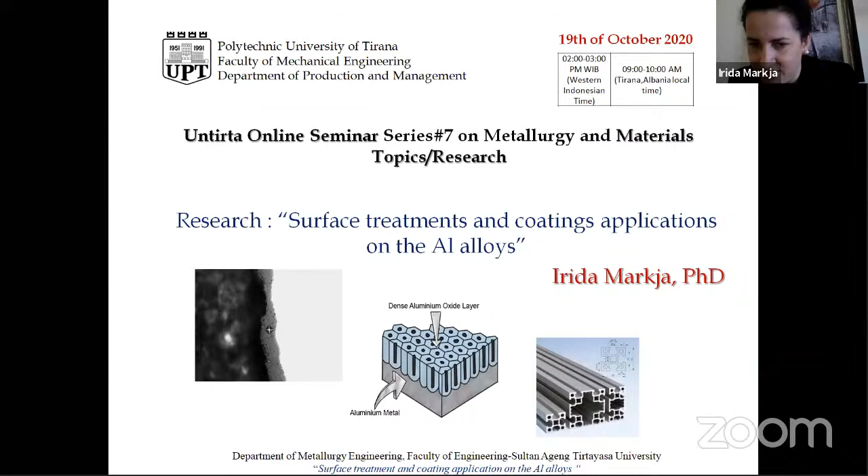As a definition, surface engineering is the treatment of the surface, or metallurgical surface, also near-surface regions of materials, to allow the surface of the products to perform the functions, and also to increase the properties of the materials differently from the bulk of the materials.

As a definition, we know from surface engineering, the properties of the materials increase to create a new surface or a thin layer with different treatments. We will see today anodizing as a process for aluminum products, which is a process adapted for aluminum chemical composition, or aluminum as an alloy, not aluminum as a metal.

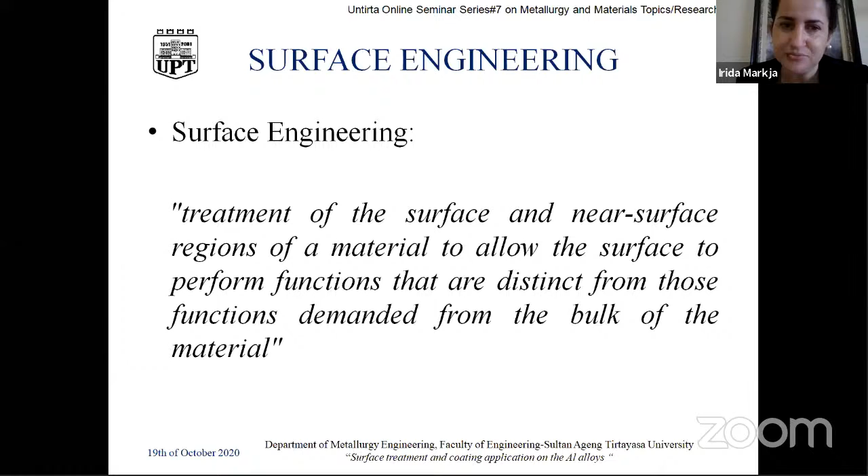The desired properties or characteristics in the field of surface engineering: components need to improve the mechanical properties, also tribological properties. We can distinguish improving hardness of materials, meaning hardness on the surface of the materials, also as tribological properties, improving the wear and also the corrosion resistance of the surface, related to the functionality that the materials or products will have.

Also controlling friction, improving the lubrication. It depends on the geometrical configuration of the products related to aluminum products.

Also, these processes underlining surface engineering refer to different post-processing to create a new surface layer with the properties that we need, to have long-term or long use, to have a life cycle of the product different from without treatment.

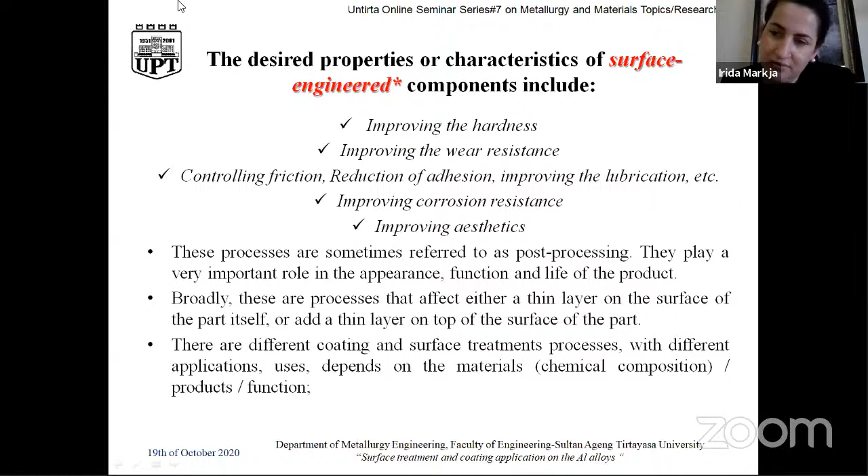And we will see what I have tried to conclude in this presentation: a comparison between an aluminum alloy without treatment, without anodizing, and an aluminum product of the same chemical composition with surface treatment, or an aluminum product with anodizing, creating an oxide layer on the surface with a thickness related to the standard and the industry, to see the differences and compare the properties. In our study, we have compared micro hardness and the results after comparison.

This is the aim of this research and this presentation. My presentation is not only my own work, it is related to my colleague, and part of the samples, and our students who worked on a small study for their diploma degree.

We will introduce the influence that anodic surface treatment parameters have on the thickness of the layer created, and the different structure created on aluminum products. This is the layer that will have the function during the functionality or work of the aluminum products, or however they will be used.

The materials used in our study or research are from a company in Albania, Alumil company, and the series we have worked with is from the 6060 aluminum series.

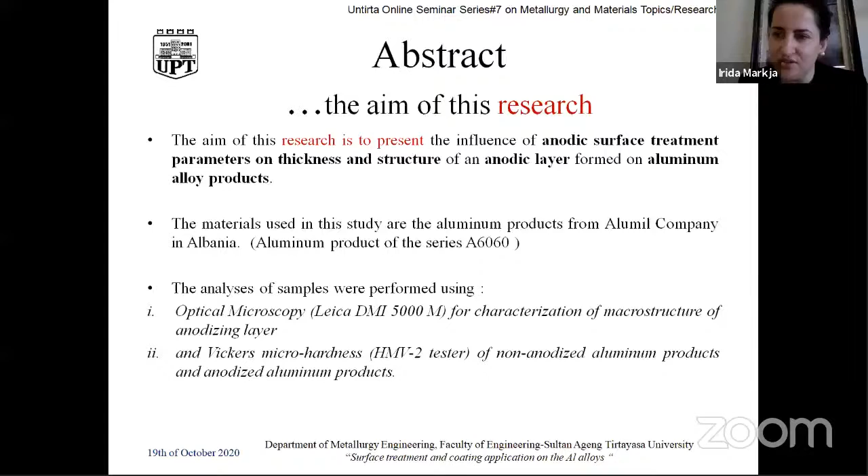We know that aluminum and its alloys, in our modern technology, have more advantages, and are the world's second metallurgical product after steel, due to some nice properties that modern technology uses, especially low density and good thermal and electrical conductivity.

Due to the complex of advantageous properties that aluminum alloys have, industry and technology use them, and we see that aluminum based alloys are very useful due to the properties they offer.

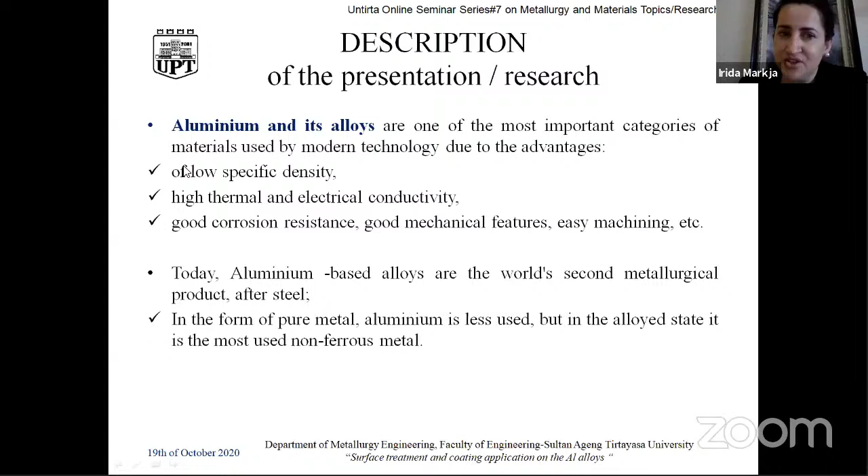Surface treatments and coatings are applied to aluminum products to enhance their performance and improve surface properties of final products, such as the tribological properties we mentioned in the first slide.

Not only anodizing, but different types of surface treatments are applied. Anodizing is one of the best or more useful from the industry, because the oxide layer achieved is very protective for aluminum products, especially when these products have complex geometry, depending on the engineering technology.

They also have a few decorative purposes with different colors, which is part of aesthetics in modern technology, or in our days.

It's one of the common methods for superficial oxidation processes, also carried out through anodic oxidation. It's a chemical reaction on the surface of aluminum products which creates the oxide layer.

The usability of aluminum products and aluminum alloys after anodizing treatment, or chemical treatment on the surface, depends on the properties that the oxide layer achieves during this process, because it depends on the chemical composition of the aluminum alloys.

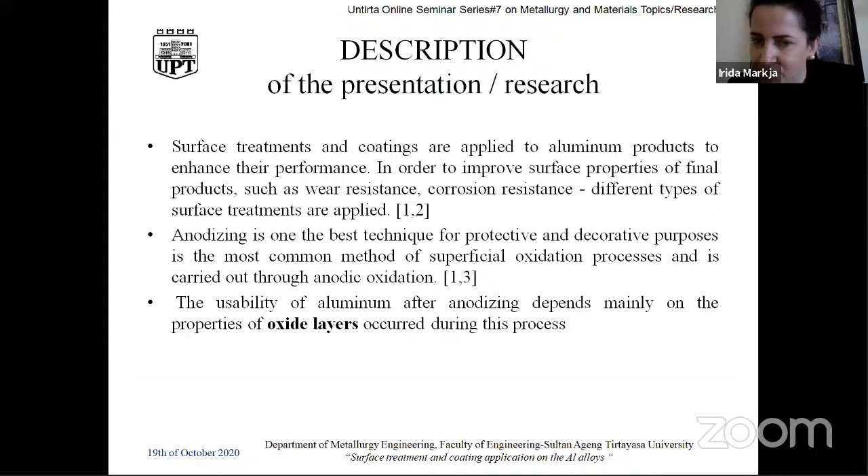As a surface treatment, it's an electrochemical treatment that increases an oxide layer, not too thick, but a thin oxide layer on the surface of aluminum, which will be the layer responsible for the life of the products.

This is a scheme that tries to connect the processes of electrochemical treatment.

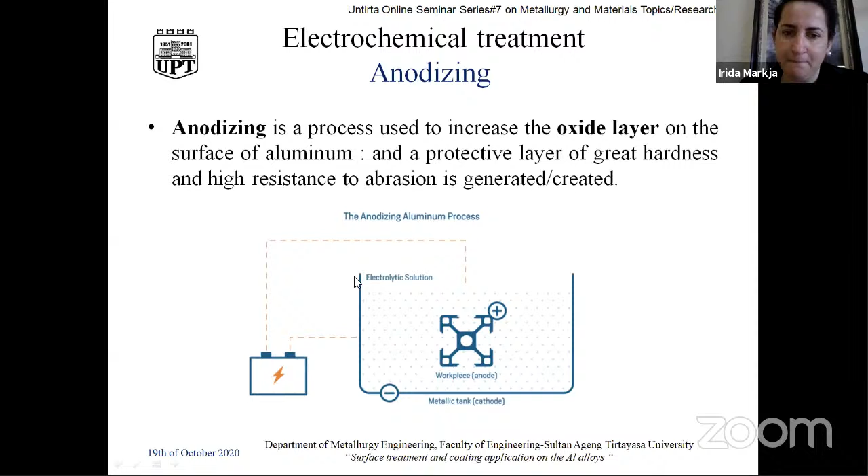The first section of our study is to evaluate the thickness of the oxide layer created after anodizing. First, we carried out the transverse section of the anodized profile samples after polishing and metallographic preparation in our laboratory. Observation for thickness estimation of the oxide layers was performed with 500 and 1000 magnification using an optical microscope, and micro hardness Vickers with 400 magnification.

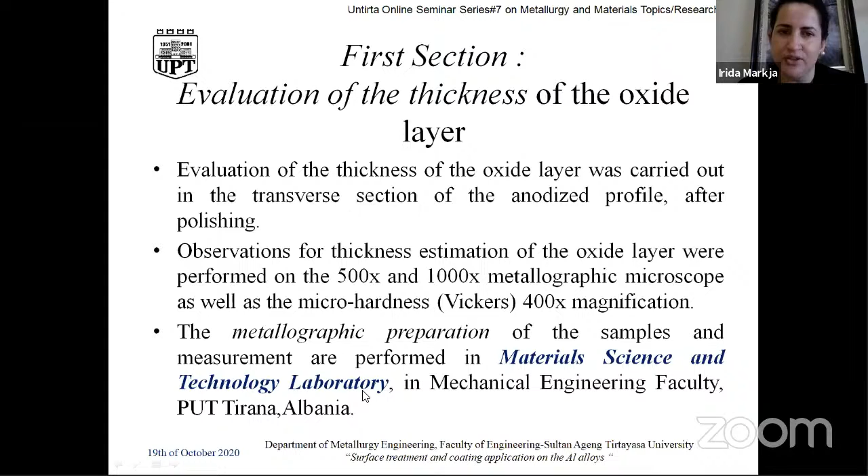Metallographic preparation and the equipment, we actually have them in our laboratory, performed in the material science and technology laboratory in our faculty. The second section, after evaluation of the thickness of the oxide layers, is that we estimated the anodized layer, and our work or research is focused on the experimental part for estimating the thickness of the anodizing layer.

And micro hardness Vickers we have performed on aluminum products with anodizing treatment on the surface, and on aluminum products without treatment. For sure, we have taken the samples in different elongations of the aluminum profile, in different sections, to see the anodizing process along the whole aluminum profile, and the homogeneity of the process at different points and different sections of the profile or of the surface engineering,

because we should have a homogeneous anodized layer or surface layer, to have a compatible surface and the same properties at different points of the surface. From this analysis, the engineers responsible for the analysis, or from our research, we will see the results and say that, let's say, 95% or 100% the micro Vickers is the same at different points or sections of the aluminum products.

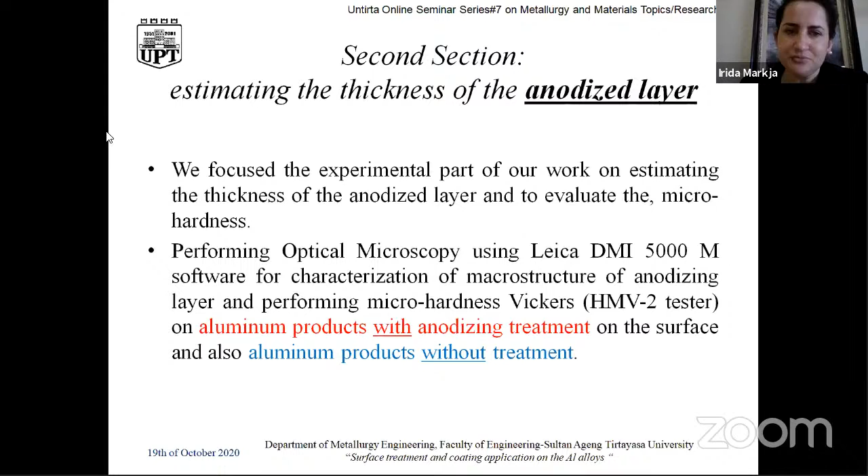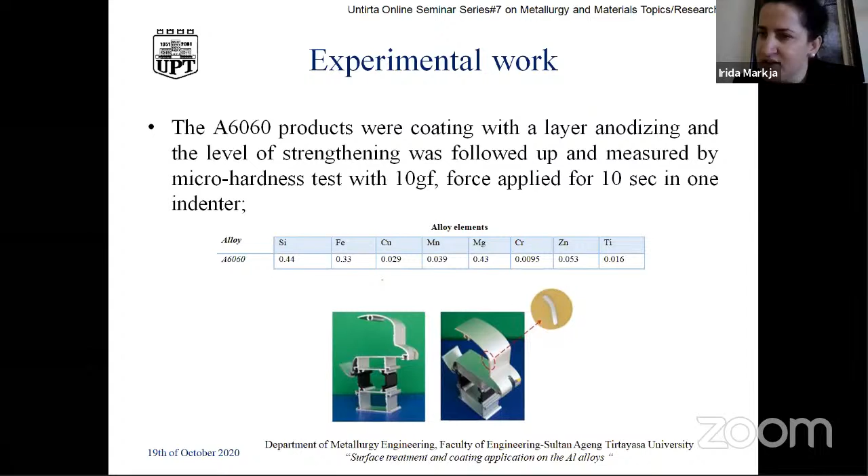The series products used are from 6060, and I have shown the chemical composition of the elements of this series of aluminum. The micro hardness Vickers is tested with 10 gram-force, and the force is applied for 10 seconds for each indentation measurement. Also, part of the research and experimental work is focused on the thickness of the anodized layer, but maintaining the time for the anodizing bath is important for the results and for the properties that the oxide layer will achieve after the experiment.

These are samples that we have prepared, two planes or two sections of the samples. And this is the microstructure and the oxide layer created after the anodizing process. And here is one indentation, which we have taken with optical metallographic microscopy. And this is the whole oxide layer created on the material. And this is the aluminum profile without treatment. This is the new surface created from the anodizing process,

where we will see that the thickness is not the same throughout this microstructure that we have taken at the moment with one indentation. So along all the layers, we will make different indentations to see the micro hardness and to measure the mechanical properties of the samples or of the layer. The magnification for this microstructure, we have used 500.

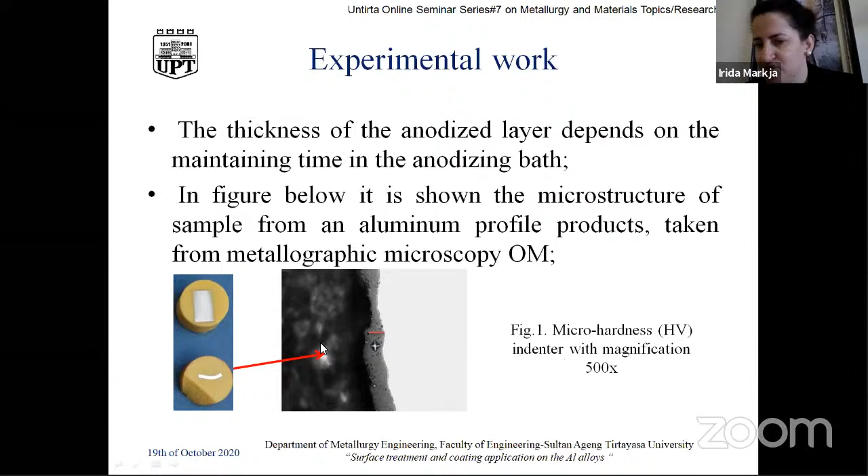As a conclusion, from the definition of surface engineering, the anodized surface of aluminum products, based on the micro hardness measurement results, has higher hardness compared with aluminum samples without surface treatment. The micro hardness of the anodized layer is in the range from 420 to 560, which is great, because for steel with a medium heat treatment we have hardness in the range of 400 to 500 Vickers. The aluminum samples without treatment, for our profile, range from 55 to 70 Vickers. So it's a very big difference between the materials before and after surface treatment.

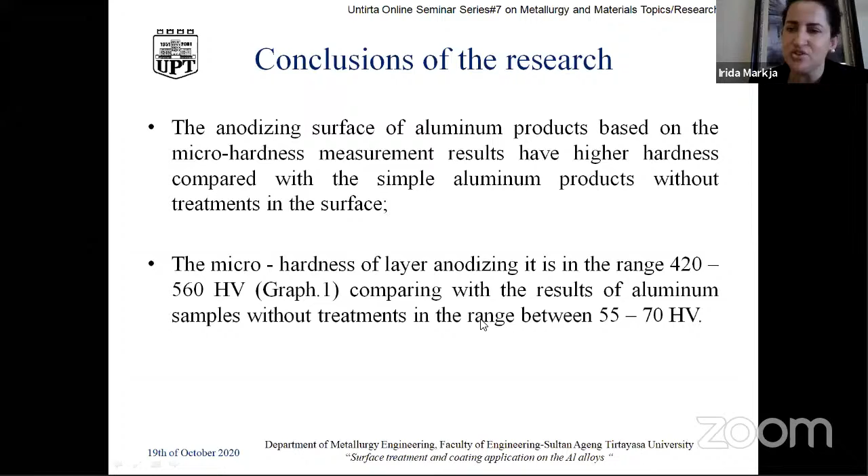The conclusion we have shown in the graph, which compares the homogeneity of the surface treatments, because okay, we achieved a higher hardness, but one of the most critical issues is the homogeneity of the surface treatment. So in this presentation, we have shown 10 measurements for different distances, but the whole paper has more micro hardness results to see the homogeneity of the oxide layer created on the aluminum surface.

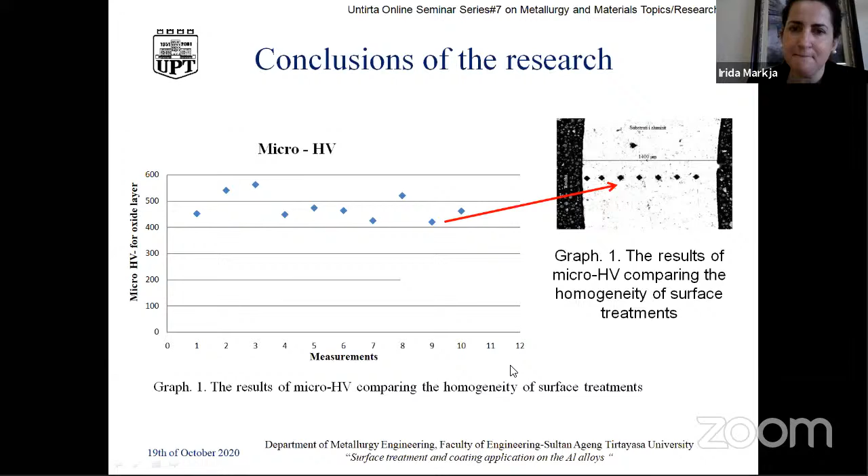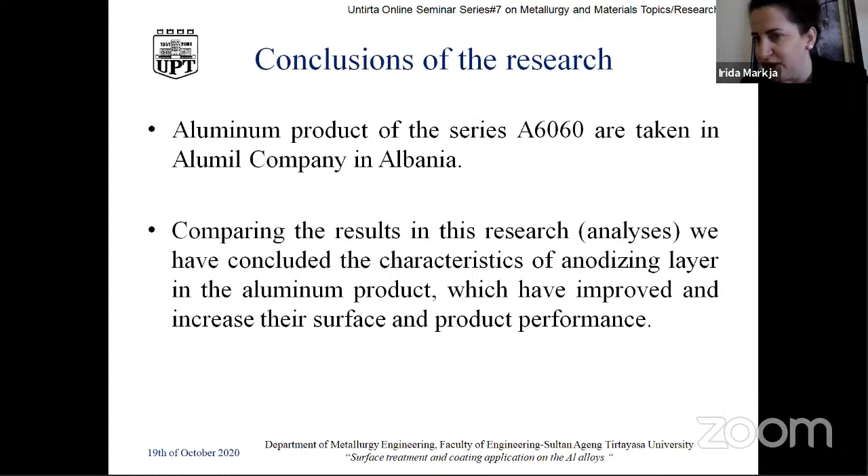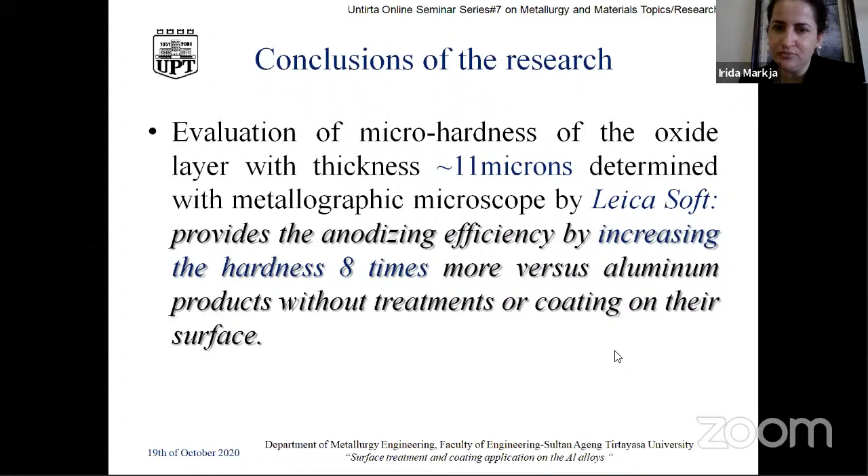Comparing the results after the micro hardness analysis, we have concluded that the characteristics of the anodized layer have improved and increased surface and product performance. Evaluation of micro hardness of the oxide layer with thickness 11 microns, determined by our Leica software, shows that anodizing increases the hardness 8 times versus aluminum products without treatment or coating. This is the main conclusion of our research for the aluminum products we took from the company in Albania. The main references in our work were the American standard for surface engineering.

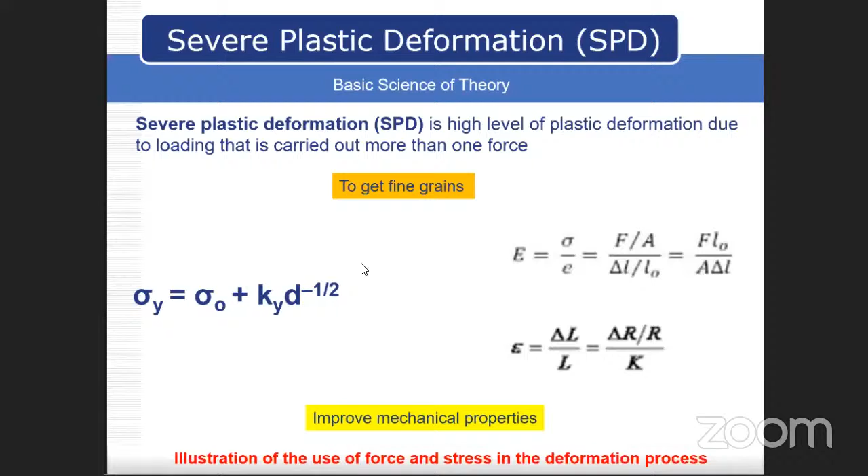Severe plastic deformation is a generic term describing a group of metalworking techniques involving very large strain, typically involving complex stress states or high shear, resulting in high defect density and ultrafine grains. This is a scheme of pressure or force in terms of theory. We know that the finer the grain, the higher the tensile strength. Basically, the modulus of elasticity relates to the movement of dislocations, and SPD obtains increased mechanical properties.

For example, if we take aluminum series 1 to series 7 and use SPD, the mechanical properties become similar to steel or other high-property metals. If we process aluminum with severe plastic deformation, we get better mechanical properties. As far as I know, there's an effect between yield stress and grain size: the finer grain from SPD, and the modulus of elasticity influenced by stress, while the strain influences the length of material when a deformation load is given. And this is a kind of SPD.

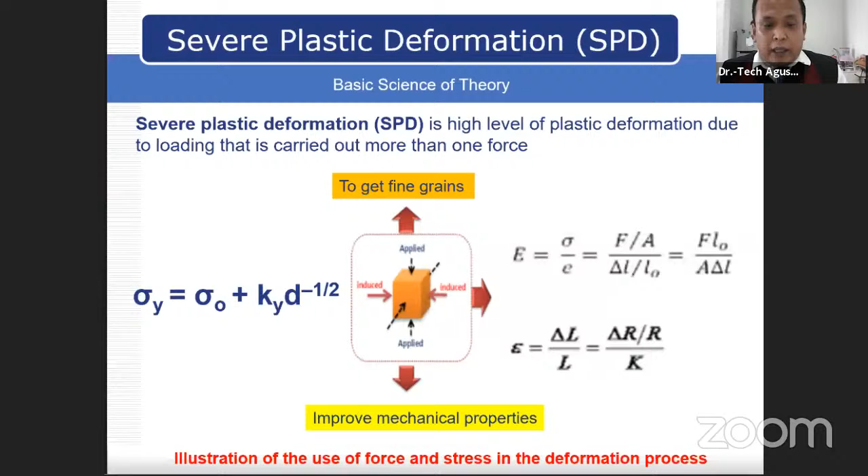Principle of SPD: there were three kinds of SPD. First is equal channel angular pressing. Second is high pressure torsion, and the last is accumulative roll bonding. You can see in here, this is two or more forces. I mean, for me, SPD, severe plastic deformation, is a collective of more than one force.

If we compare with a conventional process, metal forming for example, we just get one force. For example, forming, we just get the pressure force. But if we use ECAP, we get two kinds of force: first is tensile strength and compressive strength. For example, high pressure torsion, we get one press and one torsion.

On the dies. And accumulative roll bonding, we press in compression and then stack the plate in the sample. This is a kind of schematic of severe plastic deformation: ECAP, HPT, and ARB. In engineering, I define ECAP as a combination of tensile and compressive strength in the dies to produce a product with superior properties.

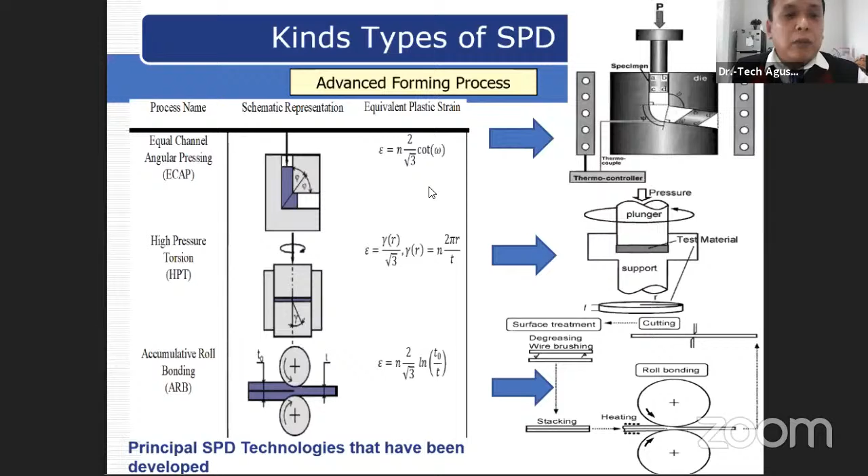You can see the strain value here, this is the same but a different formula. This is different for another process. For example, if we compare with the conventional process, if we use modulus of elasticity, this is higher for mechanical purposes, and everything depends on cycles. Cycles, I mean, we should get more than one time of pressing or one time of rolling. If we use more than one pressing, up to 10 pressings, we will get the best mechanical properties.

This is outer stress. This is internal stress that makes dislocations move. And dislocation moving makes transgranular dislocation. This is a new theory, I think, by some researchers from Russia, like Ruslan Valiev, or some researchers from the UK, like Terence Langdon.

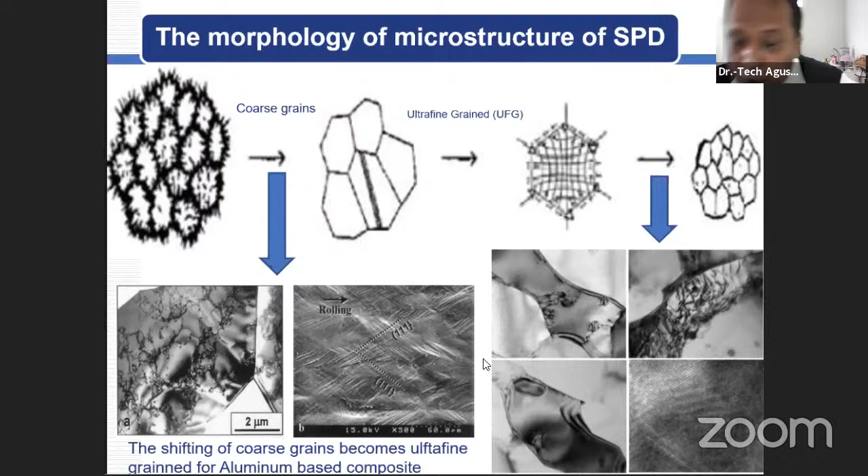It is important to know who discovered severe plastic deformation. First is Professor Vladimir Segal, who discovered severe plastic deformation; second, P.W. Bridgman from the USA; and the last, Professor Nobuhiro Tsuji from Japan. And Ruslan Valiev did research on ECAP and HPT as well, like Professor Segal and Professor Bridgman.

And here Terence Langdon got a new idea of theory. He made experiments on superplasticity, combining composite with some metal and some ceramic. For the last experiment by Professor Terence Langdon, he reached 1000% superplasticity. It means he did research with aluminum with properties similar to steel and elasticity similar to plastic. It is a great experiment.

So, Mr. Aditya Trenggono, I hope someday we should invite him, Professor Terence Langdon. It is great research, I mean. Okay.

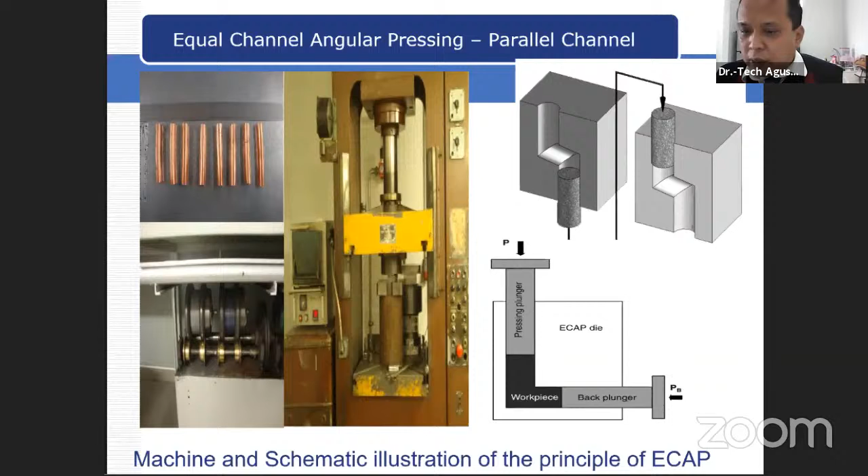So the routes of ECAP processing are distinguished by turning the sample under a predefined angle between passes, usually in degrees. How many times to rotate? It depends on the material. So route A, for example, is free from rotation; two or three times depends on the material. And route A is free from rotation.

During route BA, the sample is turned alternately in the reverse direction under the angle. In route BC, the rotation of the sample is conducted without reversing the direction, in consecutive passes under 90 degrees between each pass. In route C, the sample is rotated 180 degrees between passes. Combinations of these routes are allowed as well. For example, combining BC and C is possible. I mean, it is possible to use more than one route.

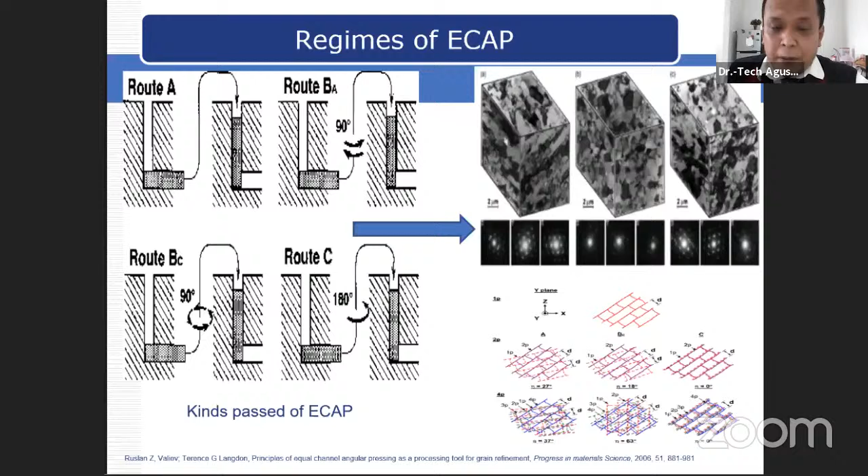So accumulative roll bonding is a type of SPD process where rolling stacked sheet material is used to refine the grain size, and generally nanometer or submicrometer grains have higher strength than conventional material with grain size larger than a few tens of micrometers. So for the stack of material, we cut some parts of different material, so we can get accumulative roll bonding.

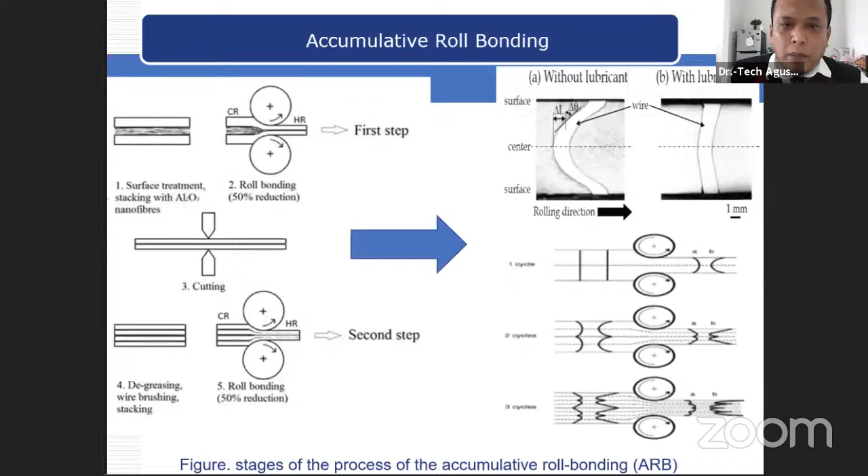So this is another improvement of SPD combined by ECAP and other methods. For the next discovery and development of SPD, I won't say much because we don't have enough time for this discussion, but during the last 15 years, SPD methods have been developed rapidly, with new methods enabling production with superior properties.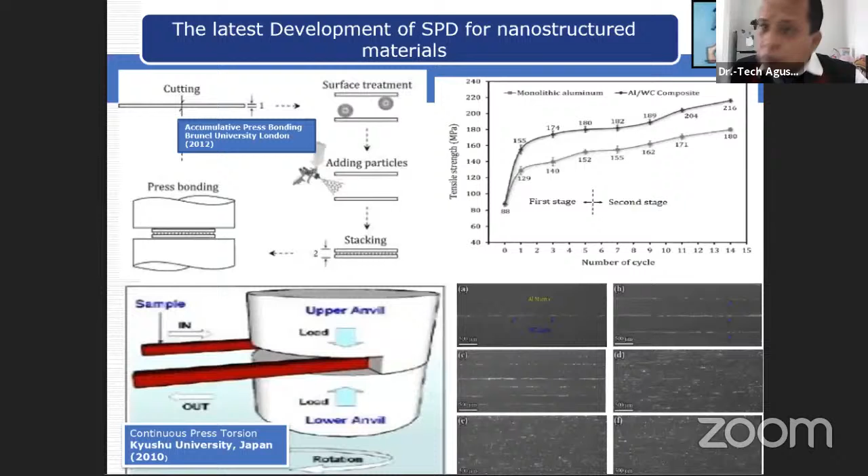Hello, Mr. Adit, do I still have time for this? Yes. Okay, you still have time.

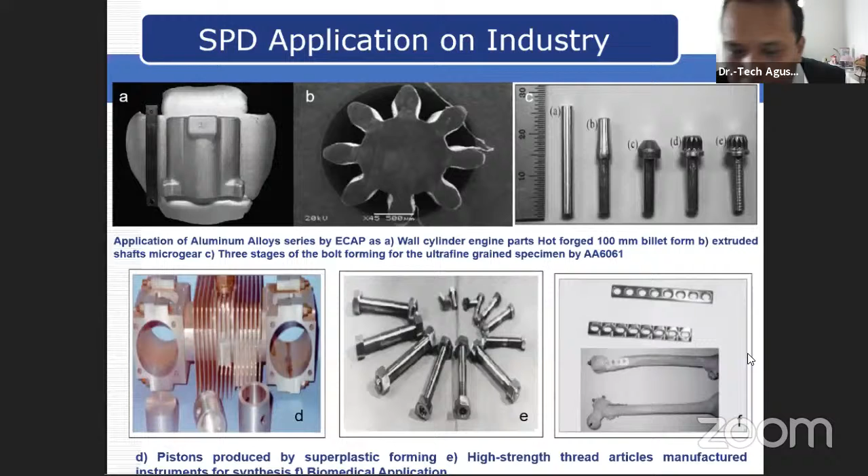It is improved in Russia. And B, this micro gear from India. This is from Korea, Russia, and another part improved in another country.

And for military application, we get some parts for helicopters, for rockets, for army helmets, for the vest army, because the product made by severe plastic deformation has high mechanical properties.

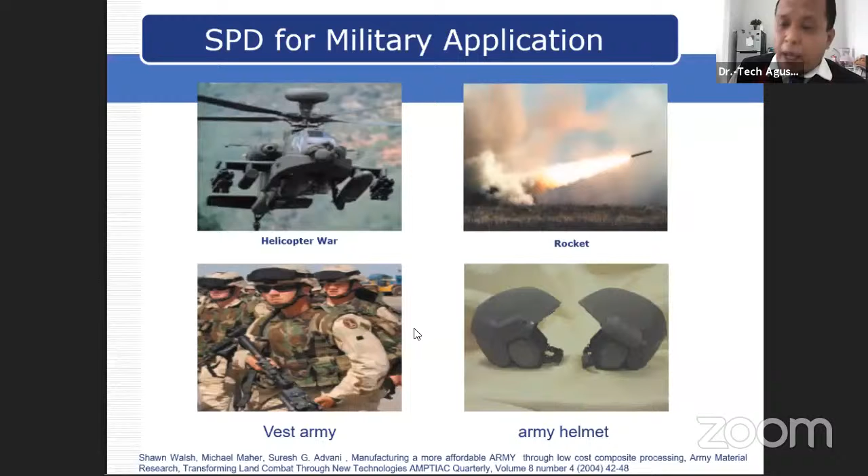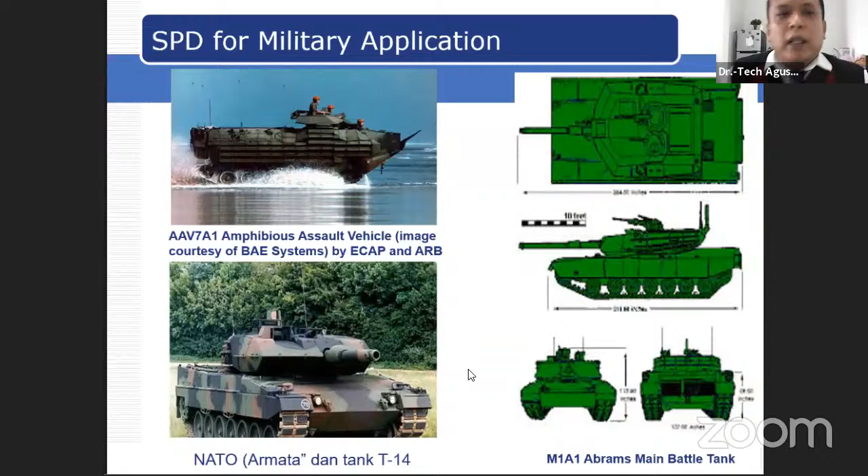This experiment research was done well by Japan and Germany. Also, NATO improved the Armata and tank T-14, and this is designed from the Abrams main battle tanks. So this is mostly made from severe plastic deformation.

In 2016, Russia succeeded in making some parts of an MPV or military car, with most of the 20 products improved by severe plastic deformation since 2016.

This is a new method by me, improved at Tallinn University of Technology with my supervisor, Professor Lembit Kommel. You know that repetitive press roll forming — pressing with an open die — is standard, quite the same as ARB, but different.

In repetitive press roll forming, we add one more press. If we compare with ARB, ARB just gets force from rolling, but in repetitive press roll forming, we get stress forcing from rolling and open die pressing as well.

So the first uniaxial pressing was carried out without lubrication, same as ARB. For example, if we use composite material, we use a 50-ton hydraulic press, and then reduction is the same as ARB, 50%.

During the second cycle, the reduction by rolling was performed with strip preheating as well, to improve formability, because for aluminum series 7 it's very difficult to press. So we add heat treatment annealing.

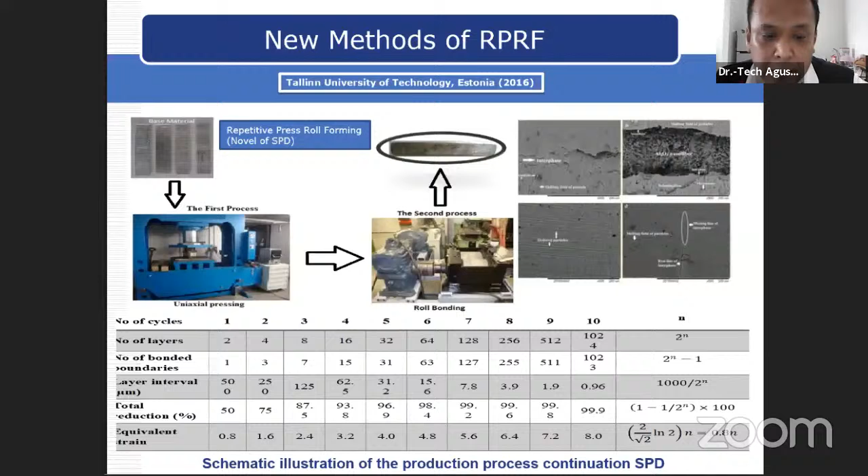This is a simulation from my project. First, based on description, theory, and results of ARB experiments, aluminum composite can be explained by this microstructural evolution during the first cycle. So the structure of ceramic and metal — aluminum, I mean — will part one by one and become embedded in a stack of aluminum here. Then the second step of rolling uses a higher temperature as well.

So producing ultrafine grain, it's possible to get the grain down to 1 or up to 7 nanometers.

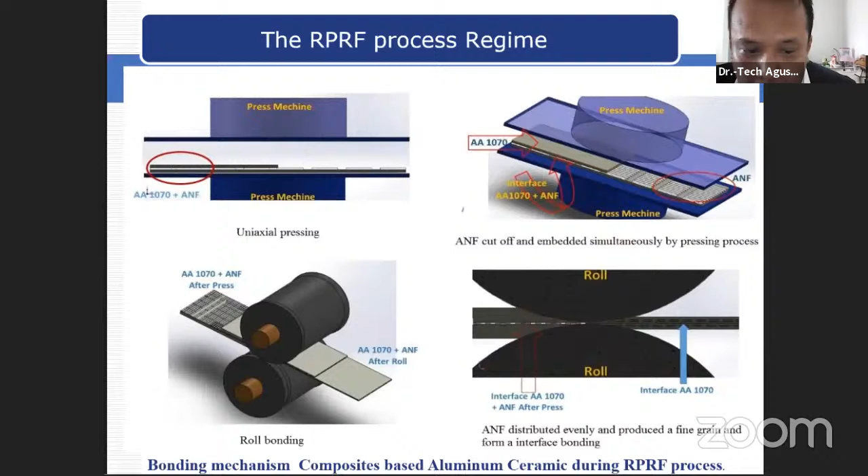Here, I'll touch a bit on this work in Indonesia, because this is my latest experimental research grant with my colleagues at the University of Indonesia.

Today we would like to improve armor material for military vehicles using repetitive press roll forming. Here you see this is by rolling, and we add pressing, so we achieved high properties, up to 1,200 tensile strength and total elongation up to 50%. For formability, we use annealing temperature as well for the aluminum-based composite.

So this is not easy to practice because we have limitations, but for some materials and some engineering parts, this is a new pressing method.

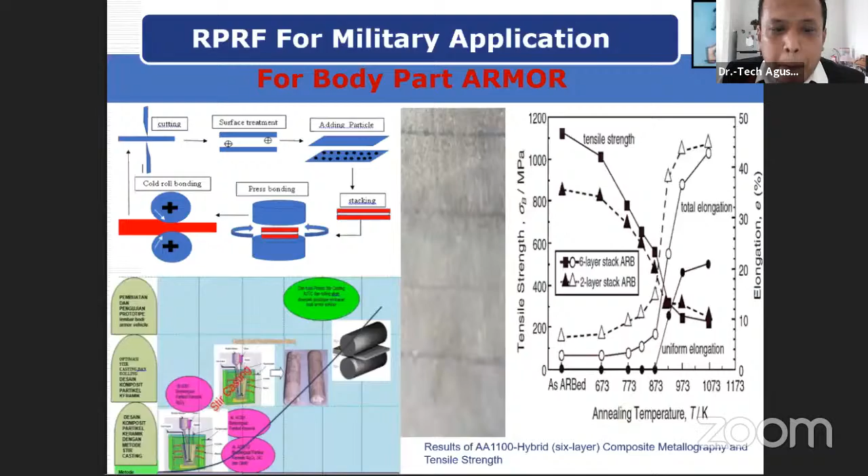So this is me and Professor Anne improving the application of military technology in some laboratory in the military in Indonesia.

Okay, lastly, I would like to share my simulation using the finite element method.

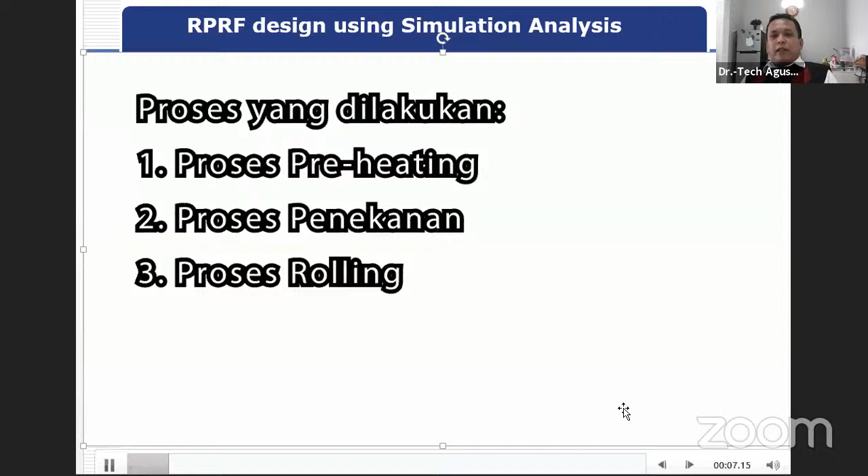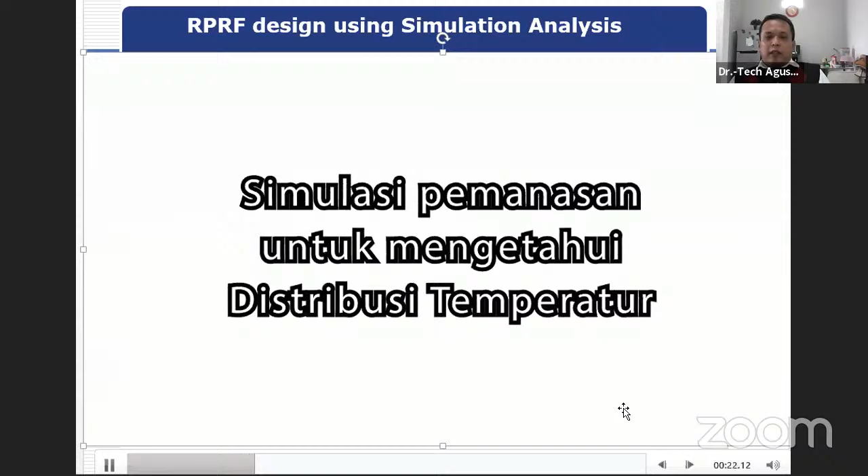This is simulation by ANSYS, new ANSYS. One is preheating for aluminum and input in muffle furnace for aluminum, and for the transfer of heat during 15 minutes, this gets the radiation and heat improve in some part. We got some value of heat, and then the next step is forging process, open die forging, I mean till 25 ton.